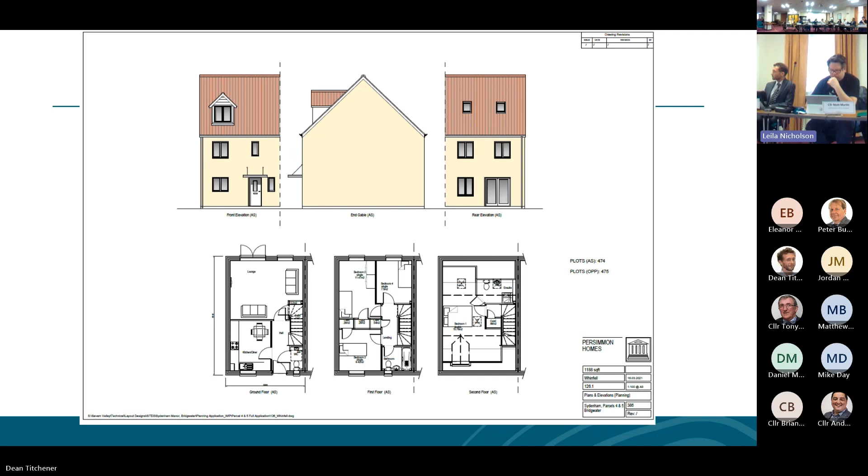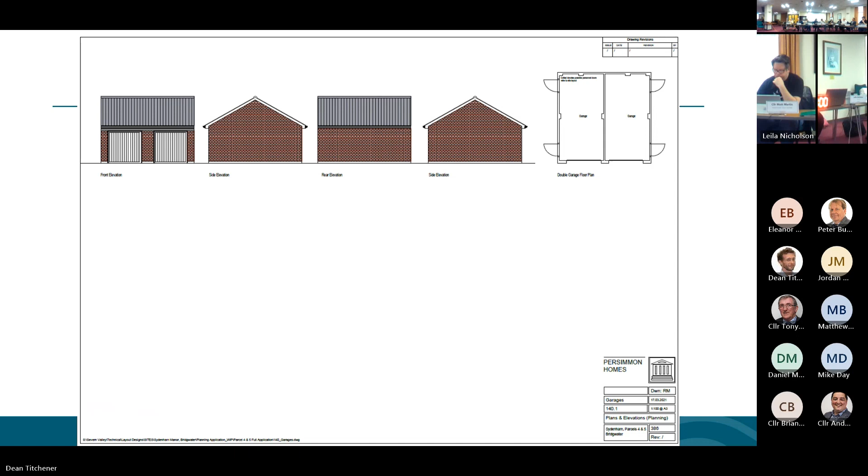Then sort of the final couple of house types. Again, very similar design themes. And then there's very few garages, but that's an example. The 2 detached houses facing north would have a garage of this type between them, which would help with acoustic methods.

And then we have the little play area, very much for the smallest children - the intent of these local areas of play is so that the smallest children can play within sight and sound of home. The rest of us would have good access. Detail of that equipment.

I think that's suggested that could be done by condition.

So starting at the top of the site, looking - the Willow Man's just behind me as I take this. There's the existing play area. There's that block of flats we saw in the previous drawing.

And then we're looking straight down the site, motorway on the left. So development would come up to follow the line of this and the block here. There is that rhyne, as you see, it's a deep one. And the bund would probably be on the line of that road there that's left over from previous activities on the site. It can be maintained from the left-hand side, and that's the IDB and National Highways England are very anxious that is maintained.

Just stood over on the left-hand side of the site, looking south again. So there's the existing houses. We get down to the bottom of the site. There's quite a lot going on because they're using the southern end of the site as a construction compound. The houses they're building just to the west - you can see it's dug over in this area. These are the house types that they're going to bring forward onto this site. So those are existing houses done by another developer, but very similar materials, general theme.

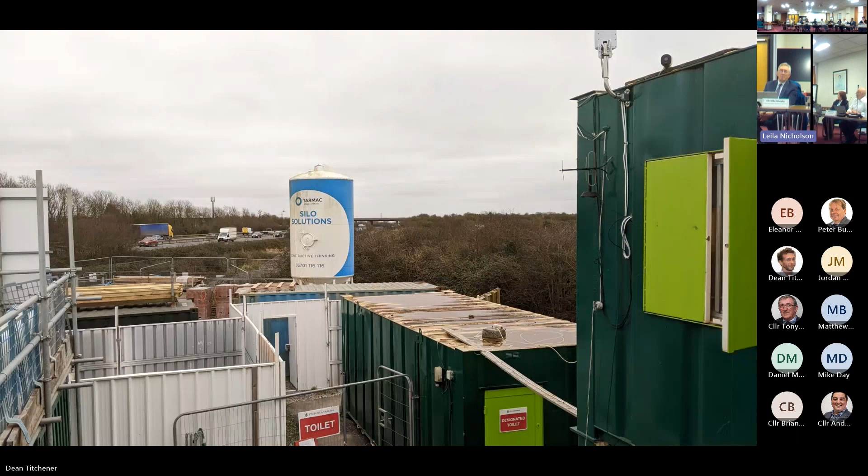This is just at that site office at the bottom of the site, just looking south - the site ends just at the end of this compound area, fence there. And that's all open area, the plans we're looking at.

And then looking north from that site office, you can see just here there is the original farmhouse with its buildings behind. Next photo just zooms in on that - so you have a sort of traditional stone farmhouse with a range of outbuildings. I think they were stables.

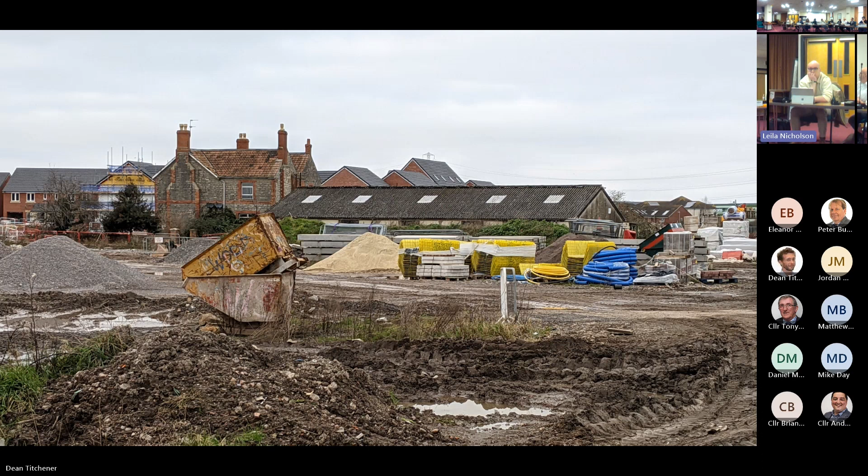Looking along the motorway, that road disappears as part of this application. The bund is potentially lined up. And then just looking at the existing buildings again, there's the outbuildings at the back — those are the ones that are part of this application. The house at the front has already been agreed for removal by a previous grant of permission.

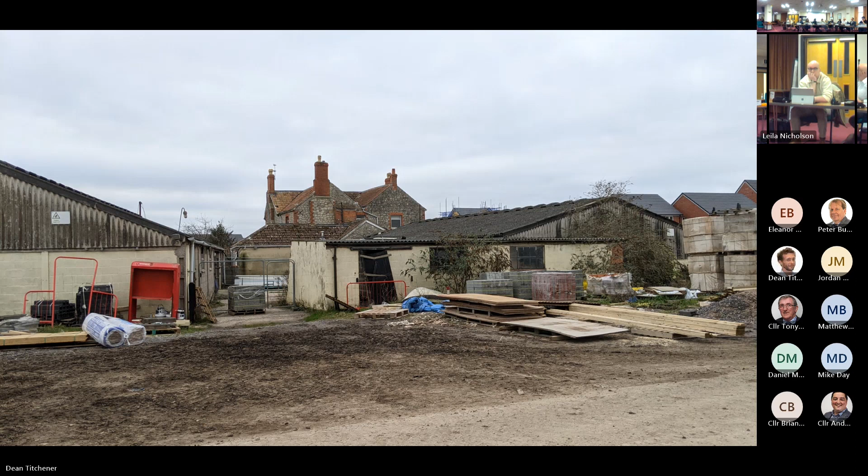Just to give you an idea of what it is, this site sits on a site that's already got planning permission, the blue edge line on the location plan. As you can see, the work is well underway on that part of the site. There you go, you can see that various slabs are already in.

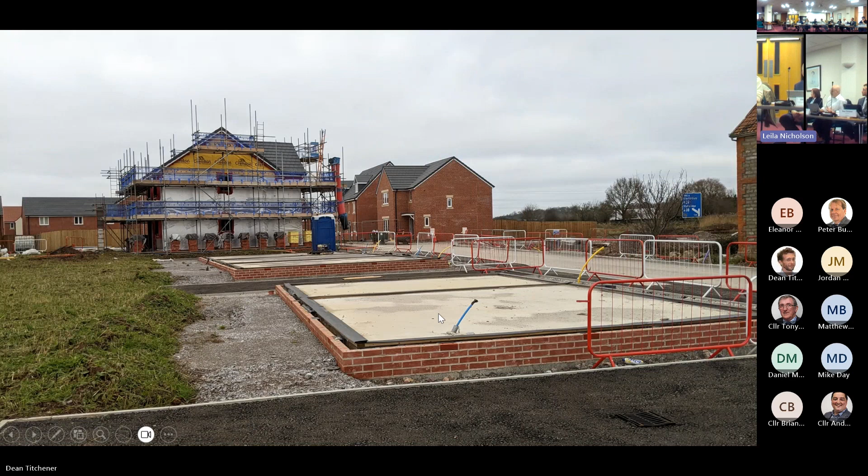And just looking across the site, back down to the construction areas, the bottom end of the site, down the far end there. So in terms of the key issues for this application: the principle — the site has already been approved for development, albeit with predominantly employment land. As set out in the report, I think there has been a reasonable justification put in for the loss of that employment land. It reflects arguments made on adjoining sites.

If we go back and picture the original layout of the North East Bridgwater development, a couple of those employment sites have already gone over to residential development. We've accepted the argument that demands on employment space have changed. It's accepted that there is a good supply of alternatives in the town, and this site, given where it is — only ever accessed through residential development — was probably an aspiration at the time. It's not needed by the market anymore, and is probably not ideally sited next to a residential area. So from that point of view, we have accepted the argument about the loss of the employment land.

In terms of highways, the access would be through the existing residential development. That's albeit not adopted yet, it's in the process of being adopted, and still being built out. There are no highways concerns in terms of how that would work, or the wider impacts of increased traffic this site might generate, given that it was originally envisaged to generate a certain amount from employment use and a certain amount from that element of residential. So any increase in traffic is probably marginal, not objectionable.

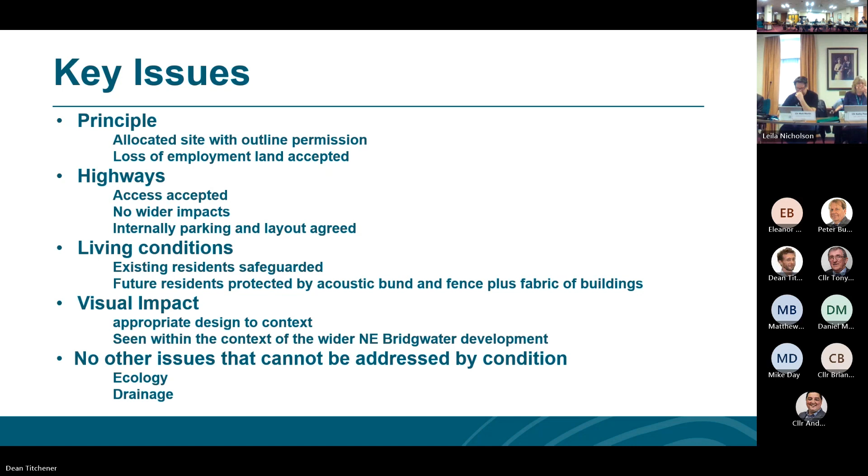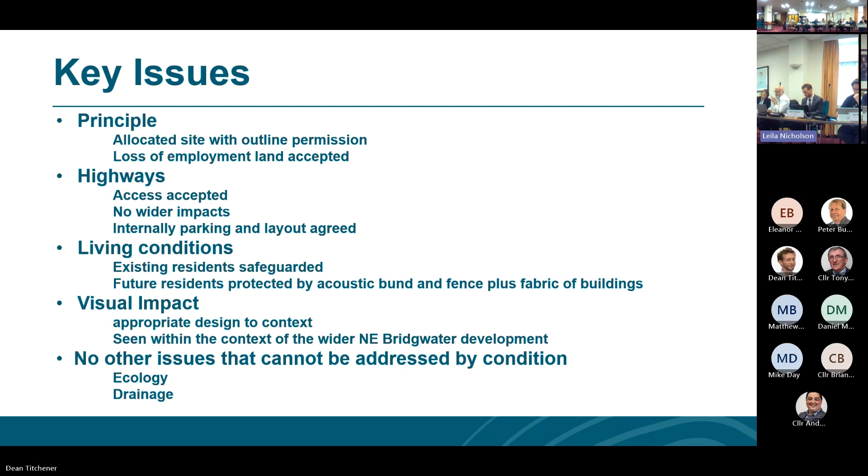Okay, hopefully you can hear me well. So I've lived in the area now for about 8 years, and even in that time I've seen that area expand quite rapidly. Even a search on Google Earth will show you the rapid expansion since 2012, and it is mainly housing. Granted, it may be needed, but my main concern is that they continue to build on what is left of the available green space. Even just taking a drive around the area, you'll already see preparations for all the other areas, which has already been alluded to on the diagrams. I think that makes it more difficult for people to get out for mental well-being, exercise and activities - it means they've got to travel further.

I have to disagree regarding traffic within the area - I have seen that increase markedly as well. The parking is poor at best, even for the already available housing. Just to get cars on the driveway is quite difficult, and because of that there's cars and vans parked on the roadsides frequently, up to and opposite junctions as well. This makes it difficult to get in and out on the main roads. I've even had to reverse out onto the main roads before. So the main concern is if anything bigger needs to get down, especially in an emergency, that's going to be quite difficult.

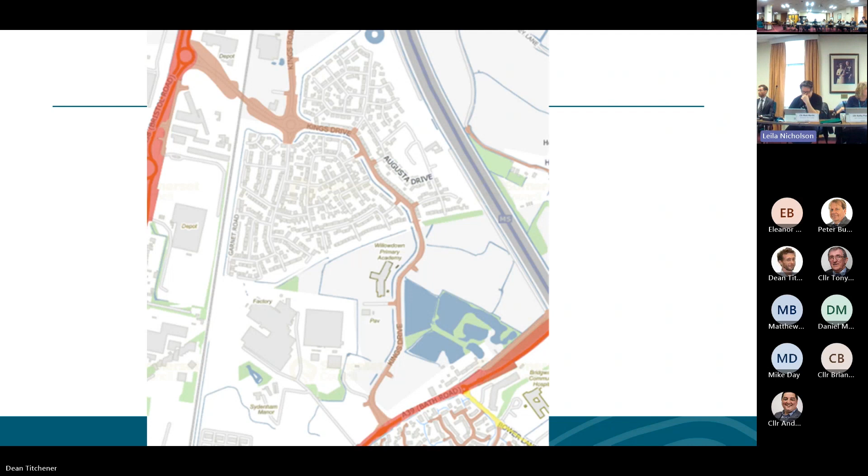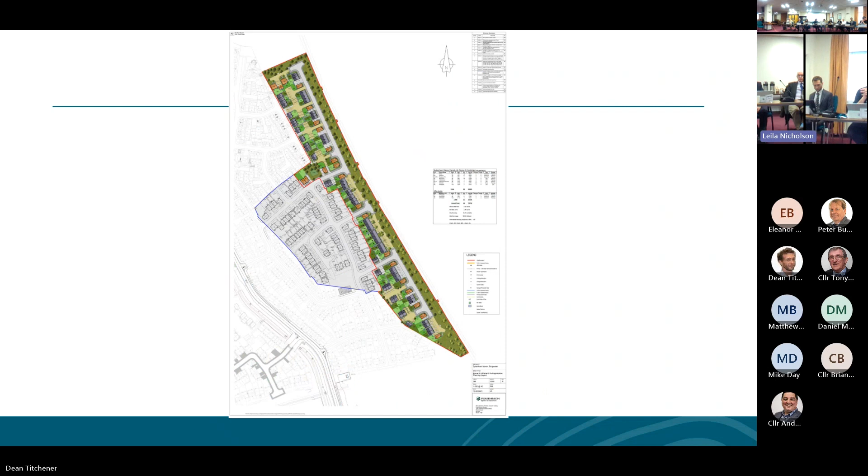Councillor Slocum: Yes, thank you, Madam Chair. Just a clarification, I didn't quite understand, my apologies. On condition 13, can you just elaborate what exactly that means? Do these house sizes meet the minimum space standards? And could you just clarify for me what size the gardens are, the actual garden to the house? Because I noticed it says 7 to 23 at the top, then 23 back to 7. I'm so sorry, I didn't understand that.

Right. So condition 13 - my environmental health officer suggested noise limits, they're not size limits. So what we're saying here is in those rooms between the hours of 7 AM and 11 at night, those noise levels are reached. Now those are LAEQ 16 hours, that's averaged over 16 hours. So we're not specifying noise limits for living rooms and dining rooms at night, simply because people tend to move into bedrooms. That's why we have a lower 30 decibel limit over an 8-hour average at night times in bedrooms.

But they also need to manage noise events of more than 45 decibels - for example, if you had a particularly noisy vehicle go by, so they need to be able to contain the noisier ones of those. So those are the internal noise limits. And then in the garden areas, again daytime hours only - nighttime it will be quieter anyway, the motorway's quieter, but during the daytime hours of 7 till 11, 55 decibels, again over that 16-hour average. So that's fairly well-trodden noise metrics that my environmental health officer is very familiar with. She recommends these on all these developments up and down the motorway.

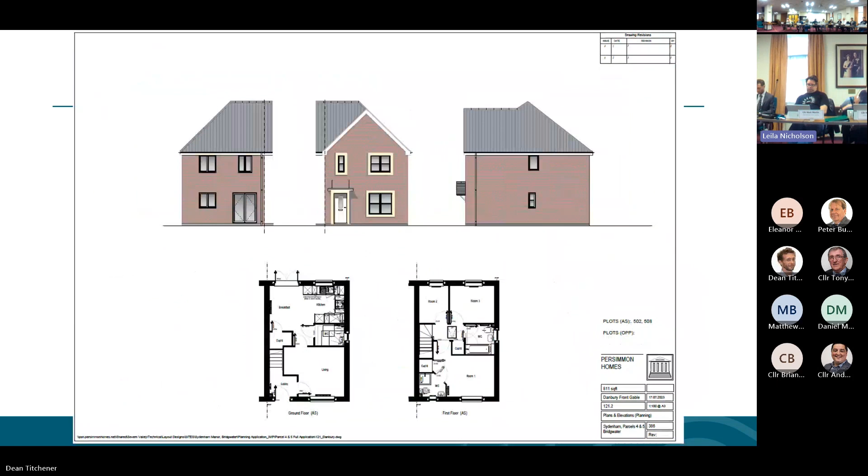Mr. New, just so everybody's clear, and not everybody will be familiar with LAP and LEAP, would you like to just explain what's involved?

A LAP is a local area of play. Quite often they have no formal play equipment, although it's been suggested here that it could have earth moulding, a few flat tree stumps or logs to climb on, basically to facilitate play. A LEAP is a local equipped area of play, larger than this, with more formalised play equipment, so that's a medium-sized one. And then at the high end there's a NEAP, a neighbourhood equipped area of play, and we're not in that sort of territory, those tend to kick in at very large developments.

This on its own, 90 dwellings, would normally trigger the need for LEAP provision on site, unless it is agreed that there is alternative local provision available, which is what we would read in this instance.

Thank you. Councillor Martin. Thank you, Chair. Excuse me, my question was about the LAP as well, actually. To follow on from that, it's not a very big area, but it is in a good location, centrally overviewed by some houses, so there's supervision and whatnot.

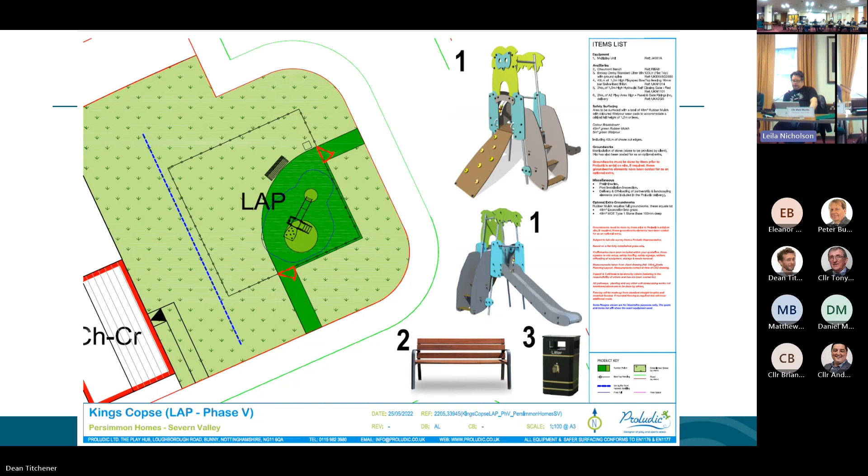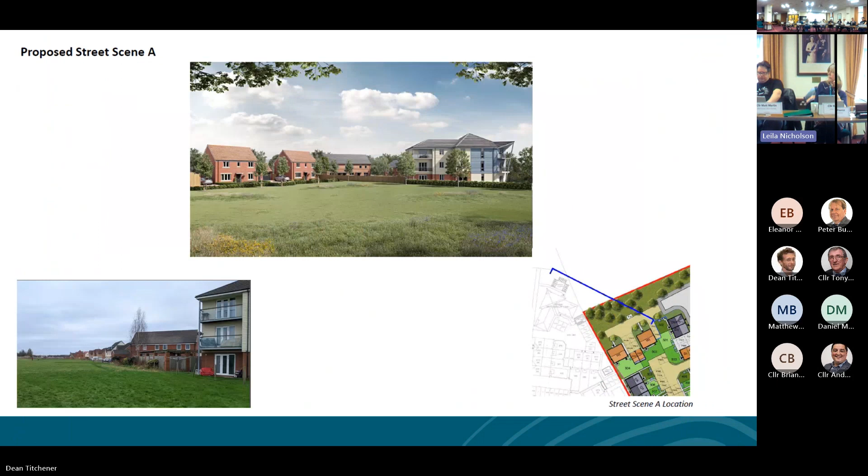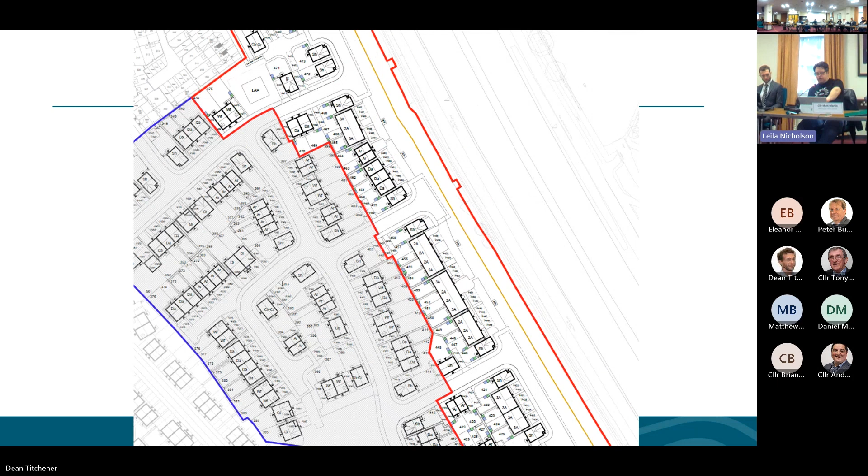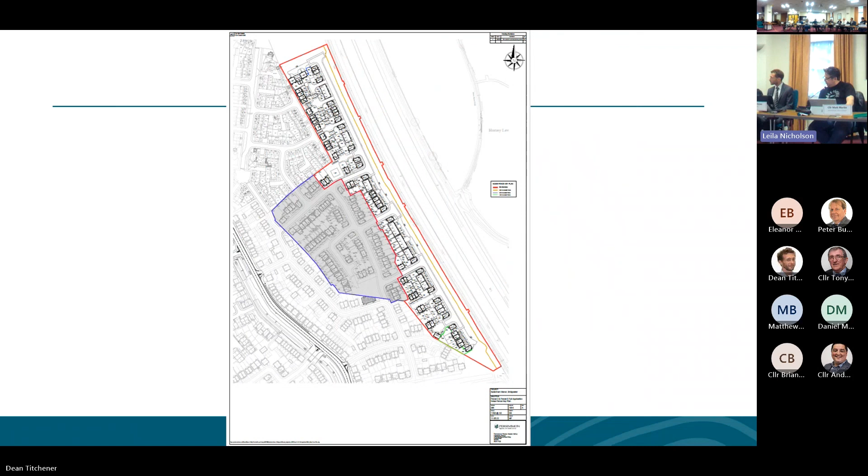But I was looking at the bund plan and the overall site plan. Now, we have the LAP in the centre, but that's going to cater for very small children. How many dwellings are there going to be here? There's quite a number, 90, a good number of which will be occupied by young parents who have young children who grow up into teenagers. And try as I might, in all my years as a teacher, I could never get them to stop playing football. I noticed the only other open space here, apart from the area up at the Willowman, down at the south of the site, is a moderately sized green space, maybe 8 or 10 houses in size.

I can bet £1 that people are going to play football down there. What worries me is that the motorway is right next to it. I'm no athlete, but I bet I could get a ball over that hedge, right onto the motorway. Has it been considered to install something like a rugby-style net there to stop balls going over?

Children will do what they do. Sorry, wrong drawing there. So the bund does extend around that area, that's 5 metres.

Kickable over, I accept that. It's 2 metres tall, so from that point of view, it's not formally an area of play. It's an area sort of landscaped. It was difficult to fit anything in down there. This is left over, unfortunately.

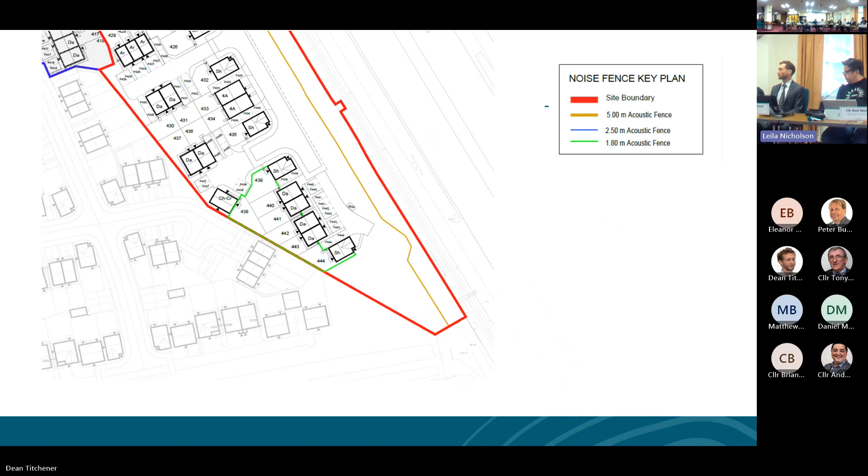In the same way, I suppose, if children chose to play football in the street running alongside that Bund, there would be the risk of that. It's a reasonable distance the other side of the motorway.

Where's that typical section there? So you've got a considerable distance from the other side of the level area, the Bund, the maintenance strip, the Reen, the motorway, verge. It's not something that my play officer has identified as a risk.

I think possibly we're in danger of straying into worst case scenario. If someone was determined to do something silly here, they might find a way of doing that, but I don't think it is realistic to expect that. I don't think that bottom area will be attractive as a play area. It might, in terms of kicking ball games.

Well, you were a teenager, I'm assuming, if you remember that far back. But I think, in the same way, that green space to the north of the development is flat level grass, just as likely to go over from there. There's no evidence that's been occurring from the current use of this existing area. We would know about it if it did - I think it would have been flagged up.

Okay, thank you. And as Dawn points out, there is no bund along this area of open space currently. So I appreciate the concern, but there's no evidence that it's a real one.

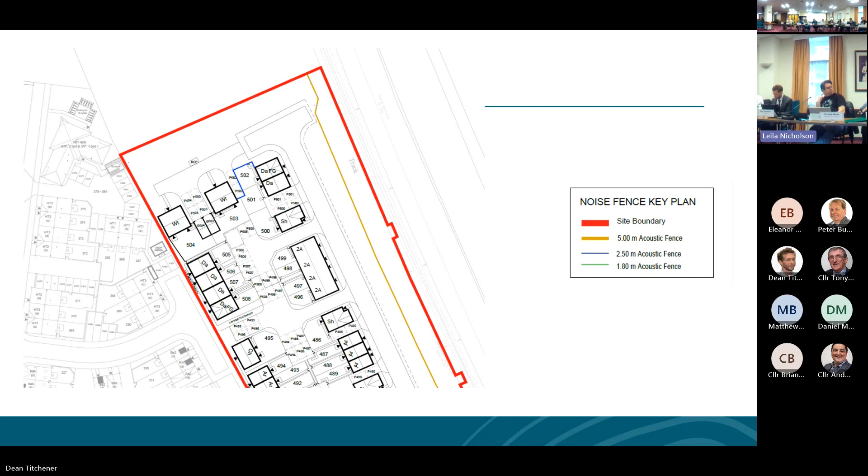Query about all this - I mean, it's starting with the bund. When you showed us the cross-section earlier, the motorway was showing quite considerably higher, and we're saying the ground level is going to be raised. So when we talk about the height of the bund, are we talking about the height above the raised level? We've also had issues with bunds on previous sites because when they get built, they have a habit of sinking, so they don't remain at the height you put them in to start with. The ground drops, and if we're dropping it on ground that's already been made up, that's likely to drop even more. But the motorway isn't going to drop.

So how convinced are we that that bund and fence is actually big enough? Because we're only talking about 5 metres in total, which is not great when you compare it with the size of the properties going behind it. And if that then subsequently sinks as well, I'd like to know how we make sure it remains at the height it's supposed to be and doesn't drop.

I'm alive to that issue because I've got a feeling the bund might prove to be quite steep, and that creates issues for stability and also for the landscaping, because a very steep, narrow bund has got potential to be very free draining, meaning the landscaping must take that in mind. I did insert the word technical into condition 12, so the details shall demonstrate the technical and acoustic feasibility. The intent of the word technical is to show that it's the construction of the bund works, and that's where we would capture that concern.

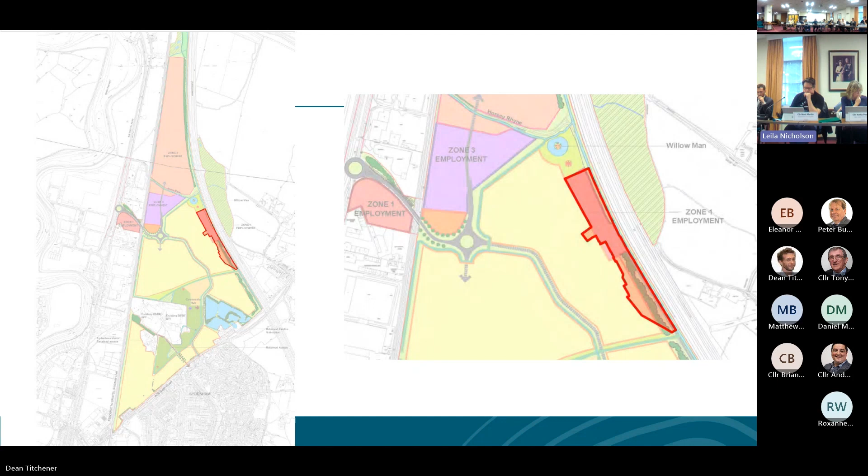Going to the ecology, the badger bit first - I think the reason that approach has been taken is there is a survey, they've done the badger surveys, it's just that survey was done roughly at the time of submission. It's been a while, so that's a belt and braces approach, just to check the badgers haven't got back on site. Given what the majority of the site is being used for, a big chunk of it being used as a builder's compound, I very much doubt that's the case, but it's belt and braces.

There is a tail piece to condition 20 - it does say once installed, such features shall be retained at all times thereafter. Whether we're going to go out there and check there's still piles of logs, I think we have to be pragmatic on that, but certainly where bird and bat boxes have been installed, and the hedgehog friendly fencing, which is my hobby horse, yes, certainly we should be on top of that. What I'd say, the flip side is this will be homes for 90 people. We encourage this sort of best practice to go in at construction, but we would need to review pragmatically if someone decided they were allergic to something and these things need to be removed. We do our best.

Thank you. Councillor Sterling, then Councillor Martin and Councillor Hendry.

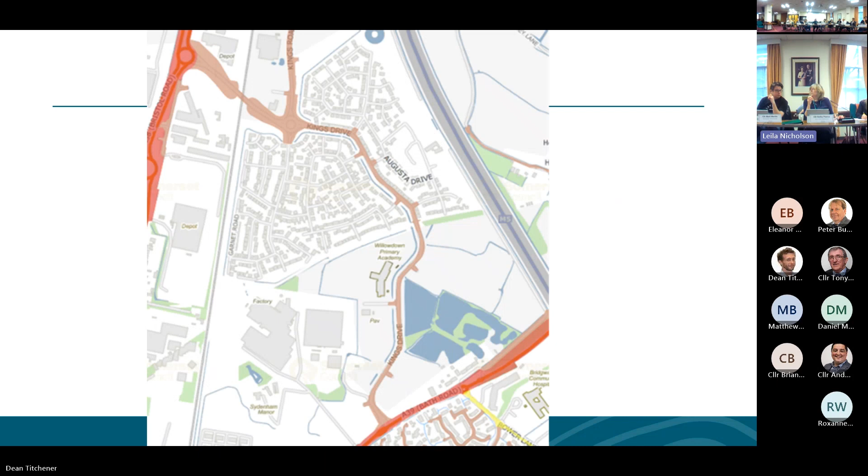Thank you very much. I always hope that we've learnt from the past, and I always hope this, but you know what? Shared drives, small gardens cause neighbour disputes right from the word go, and the need for housing is so great, but I don't think we should be packing people in to where people's health and well-being is so vitally important.

And I think to have a garden for most people is an essential. There should be a minimum space that we can give people, rather than try to force so many housing in, because people are so desperate for housing, they end up being in there, and most of the disputes happen. The shared drives, I can't tell you how many times I've had to go and sort out shared drives. Parking on the front of people's housing. It's a reality. It isn't something that's not happening.

It's happening every day. Most of the arguments that happen are about parking. And I just fear in the recommendations, I don't see anything about design. I don't see the design, the recommendations about design. I don't see anything that gives me a bit of confidence. And I'm just a little bit worried, Mr. Noon. If you can make me happy, I'd appreciate it.

Hopefully there will be some reassurance gained from pages 36 and 37. I do consider the sort of design and visual impact. There is a design code, a wider design code for the whole North East Bridgwater development. That is quite elderly now, that design code. It's of its time, I would guess.

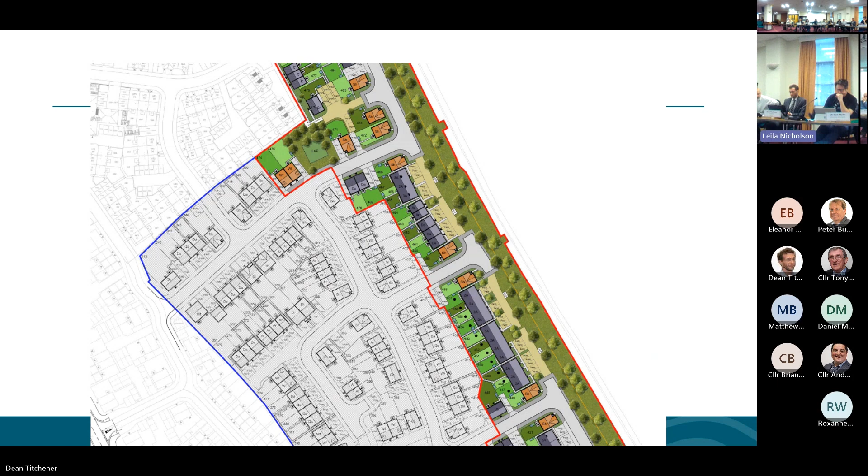It might not be the design code we would go with on a similar development if considered under current policies. But it does very much follow the principles of the design code that was set out for this North East Bridgwater development. In terms of the individual house types, they are using the same material, the same general proportions as the other houses on the adjoining parts of the site.

As you would expect, that is a logical continuation of that design, materials, and general theme approach. I think you'd be struggling to say that we should actually, on this particular parcel, do something completely different in terms of the design.

In terms of the parking arrangements first, I think these parking arrangements, I would hope, don't create conflict in that there's no shared areas between two properties. You can see that there are tandem parking spaces for individual properties. There may be some conflict within that household about who gets the innermost parking space. I don't think we can say that is a fundamental problem.

A lot of the other properties have houses parking perpendicular outside their frontages. There's no other way they can use those. So hopefully those will be retained in perpetuity and available. They wouldn't be subject to misuse.

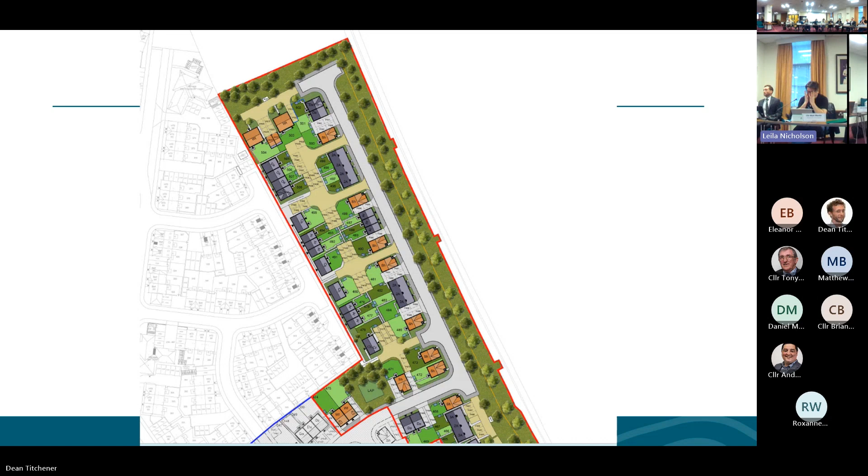In terms of design, it does say design parking to be unobtrusive, allow for future phasing out of parking to reduce carbon emissions. So in terms of the location of the parking, we are showing it to be a secondary element to the main road, which would also encourage natural traffic calming because of the right angles to go into, which again is compliant with the guidance.

And it does say reduce vehicle speeds and give priority to pedestrians and cyclists. So the road arrangement does reduce the speed of vehicles, and the open courtyard area - having occupied one of the properties elsewhere in Kings Down, the rear courtyard areas are often used by kids for cycling and things like that - so it does encourage pedestrians and cyclists.

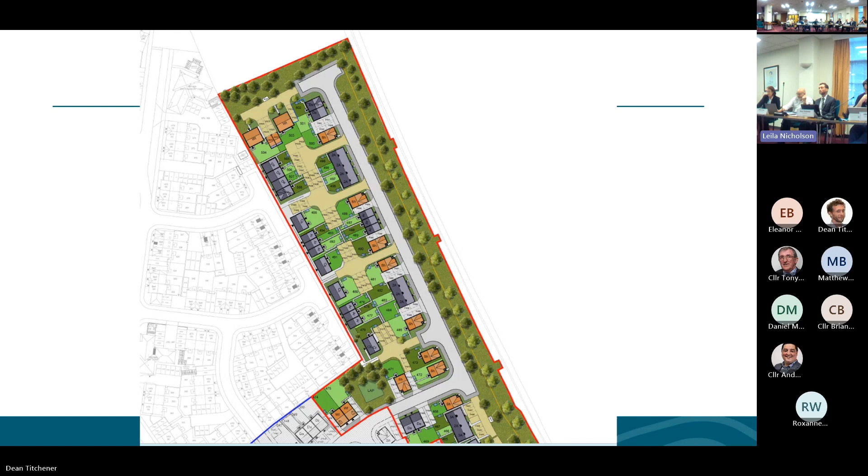And the material palettes, it said, should be simple, taking into account local context, and avoiding big areas of tarmac. So the areas shown for parking are a differing material to the main road, so it appears as a secondary element, more complementary to the built development. That's the emerging placemaking and movement design principles adopted by full council. It's not planning policy as yet, but it's had quite a good response in consultation and will be coming through as guidance for officers. In terms of how this proposal complies with emerging design movement, I think we would say we're quite happy it's in line with the direction of travel for the council.

Oh, thank you very much. Thank you for that. Councillor Martin.

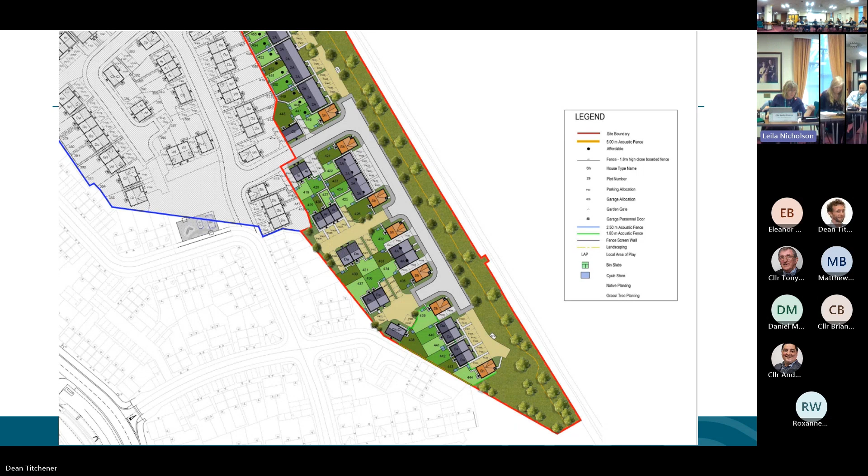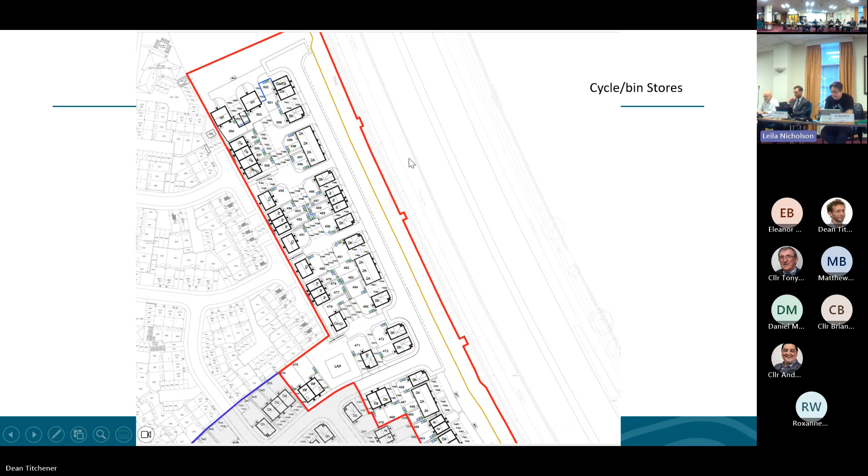But is there a way for us to revisit the bund in a certain amount of time, or to ensure that it's done properly and won't slump in the first instance? You're going to show me a condition where that's shown, aren't you? Yeah, I think hopefully condition 12, with the requirement for them to agree technical feasibility. We get the full construction methodology of the bund, and it shall be maintained, and then the tail piece of that condition: shall be maintained in accordance with the approved details.

That, you know, if the bund was to slump to a point where it no longer complied with those agreed details, there would be a remedy there. We're also looking through the Section 106 agreement to agree the maintenance of the bund, and hearing what you're saying, we could certainly include within that the management and maintenance of the acoustic fence bund. We could include a requirement that if it blows over in the wind they will have to replace it, and that any slumping could also be put right through that mechanism.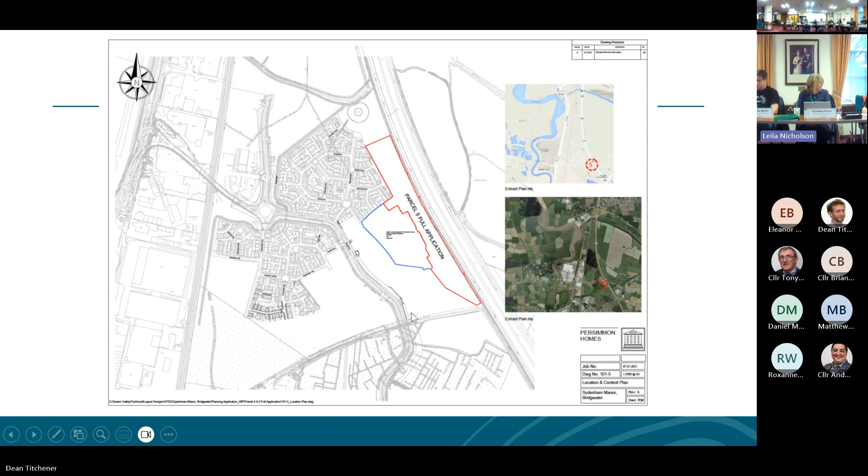Bottom southwest corner, I think, of the new development, the proposed one, shows a vacant piece of land, but the houses are all built on there now, so that slide must be out of date. Is that correct? Yeah, I think possibly the aerial shows that. Right, so this area is under construction - Google flew over here a year or two ago. So there are houses built up there now, these images are out of date, okay.

A couple of points - that in its own right could be classed as an infill, we've had this before, because of the houses northwest and the ones at the southwest, you could just class that as an infill. Given the planning history already for this plot of land, it would be very, very difficult to put up an argument to refuse this, very difficult.

Okay, it'd be very difficult to actually refuse this, given the planning history already. I've watched the presentation, it's gone on for some time now, listened to what everybody has said, which is fair comment. Conditions will have to be applied here, but that is yet to be determined and put in place. Given all of that, everything put in place, I propose we grant permission. Thank you, Chair.

Thank you, Councillor Hendry. We do have a couple more speakers, but can I just clarify, is that proposal to grant the officer's recommendation to approve with all the amendments, which I and the officers will go through before we take any votes? Is that to include all the amendments? Absolutely, that's why I said about the conditions. There are too many for me to start going through the list, but yes, you're absolutely correct.

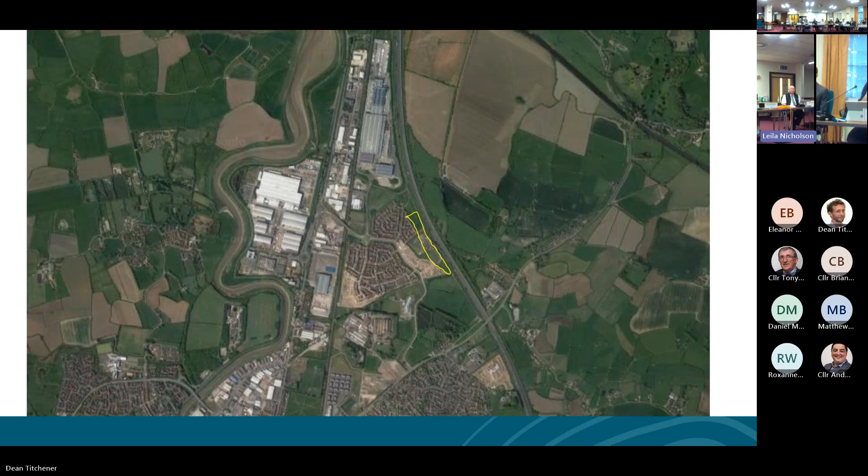And the rhyne you sorted out from the point of view of drainage, if people can get in behind with their machines and clean that out. I just wonder, 15 years for trees to grow up and obscure something. I just wonder if some of the trees could be put, say you've got the length of the bund like that, that's 15, 20 yards, you could incorporate some mature trees right in the actual bund now, to break the bund up, so it wouldn't look so bad.

Break the bund, there you are, break the bund, with mature trees. Certainly, we can take that forward as a comment when we are looking at discharging the landscape condition, I think it's condition 24, with the specimen tree planting. From my experience of looking at similar bunds in similar locations, I don't doubt that with a good landscaping scheme, that will be achieved.

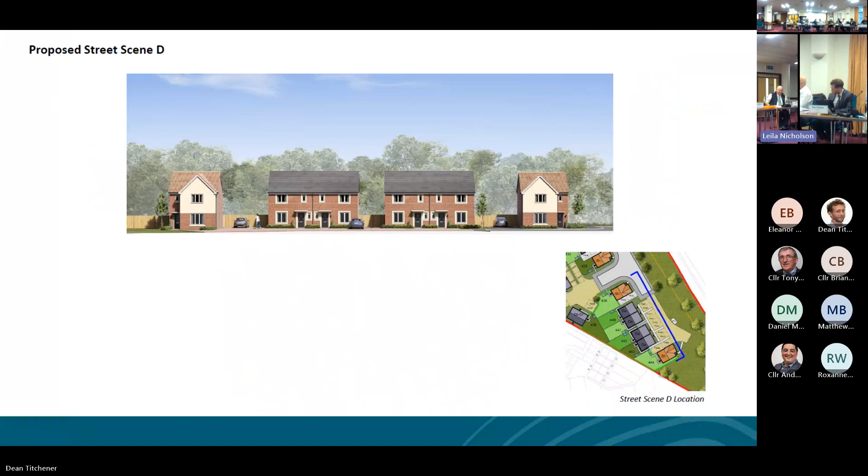Is the planting in consultation with the landscape officer? I think we need to be careful about how far we go down the route of making our own suggestions on that score. We'll be looking at the technical build with a lot of internal consultees. The management of it, and the landscaping of it, will also involve a lot of internal consultees who have all expressed interest at this stage in seeing the detail, as well as external consultees.

Thank you, I don't see any more speakers at this moment. Is now a good time to clarify potential wording for the changes of conditions and suggestions made regarding section 106 additions? So if I may clarify from my note, I've got to grant permission subject to the amendments to conditions 4, 7, 16, 19, 23 and 11.

The wording of such amendment conditions to be delegated to the officer and the chair and vice chairman - sorry, let me just read this again. The wording of such conditions to be agreed with the officer in conjunction with the chair and vice chair, and subject to any consultation response from the NHS concerning the securing of any financial contribution, if I've got that right, Adrian. And then the third point I've question-marked is the travel plan - at the moment it's a condition, are we looking to put that into section 106?

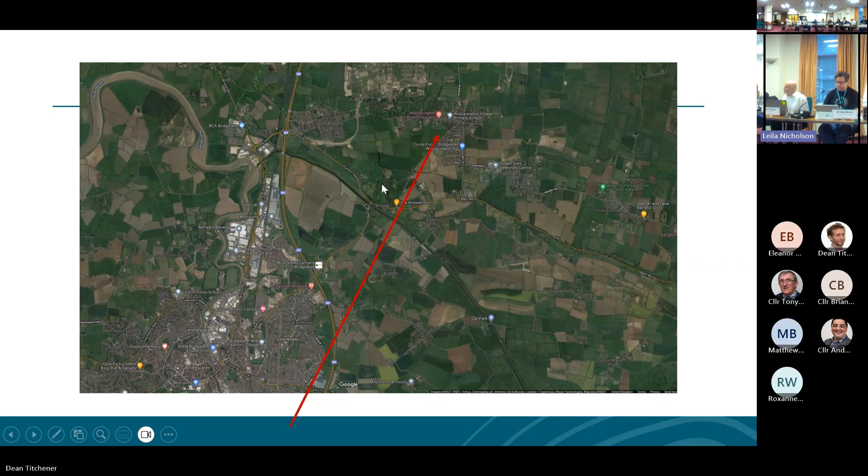So yeah, this is an application, the address or location is land south of Lavers Close, in Woollavington. It's a scheme for the erection of 14 affordable dwellings. So just to widen out to an aerial plan. Woollavington is just to the northeast of Bridgwater, one of our larger villages. And the site is on the western side of the village.

So this is the plot, these two rectangular shaped fields here. Lavers Close is actually this development immediately on its north side, which will be accessed through. So with the location plan I've shown here, the access comes through the first scheme, providing access to the two adjoining fields.

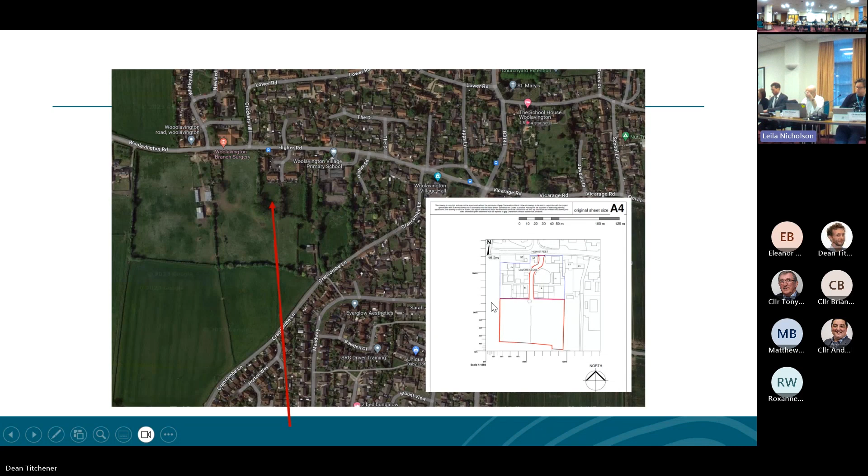So just doing a couple of photos to get some context. It is currently an overgrown meadow, bounded by a mature hedgerow and tree planting. As shown by this image, there is a central mature hedgerow which would need to be lost, along with some foliage tree planting, to facilitate the development. So that would need to come out. That's showing some photos.

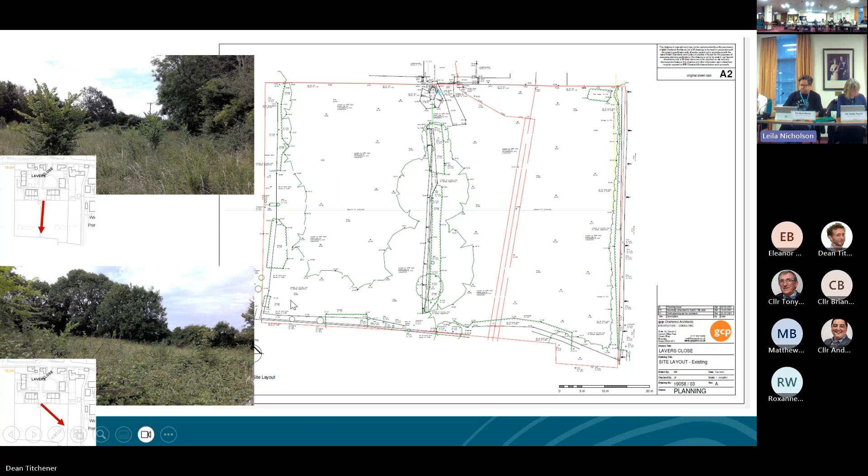And then this is effectively the layout as it would come in from the existing site to the north. There is an existing turning head from where it will come in, and then it continues. So it's 14 units of access, offering a very simple T-shaped road layout. There is space for a LAP, a local area of play, at the far eastern side, and there is an ecological buffer zone on the western side because of some ecological constraints.

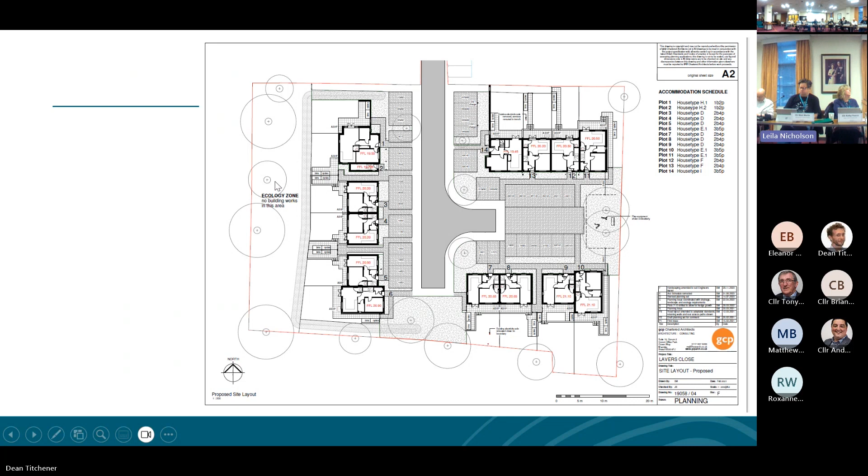And then in terms of the principal development, this is an affordable housing led scheme. Woollavington is defined in the local plan as a tier 2 settlement, so those are some of our large villages like Wedmore and Cannington.

They have their own housing target under policy T2A, a certain number of houses supposed to come forward in those villages to meet district need. In the case of Woollavington, there's already a scheme which has consent for the target, known as Woollavington Hill, brought forward by Wain Homes, for 225 dwellings. That's a part full, part outline scheme that got consent, I think a decision was issued in 2022.

So policy T2A sets an overarching target for these larger villages, but meeting district-wide housing needs rather than local housing needs specifically. Under that there was a sub-policy, T2B, which sets a basis that if you have unmet housing needs in these locations still, there's a mechanism for bringing forward additional other sites. That's effectively the basis for bringing this scheme forward.

So in terms of the principal development, I've got an excerpt here from the housing needs assessment. Policy T2B talks about proposals having to fill an identified need for affordable housing as evident in an up-to-date housing needs assessment. There was a new parish council sponsored housing needs assessment produced by our council's housing needs team, Duncan Harvey's team, in March 2023. The table shown here is an extract from the conclusions, as it identified an outstanding need for 46 affordable rented units in the parish.

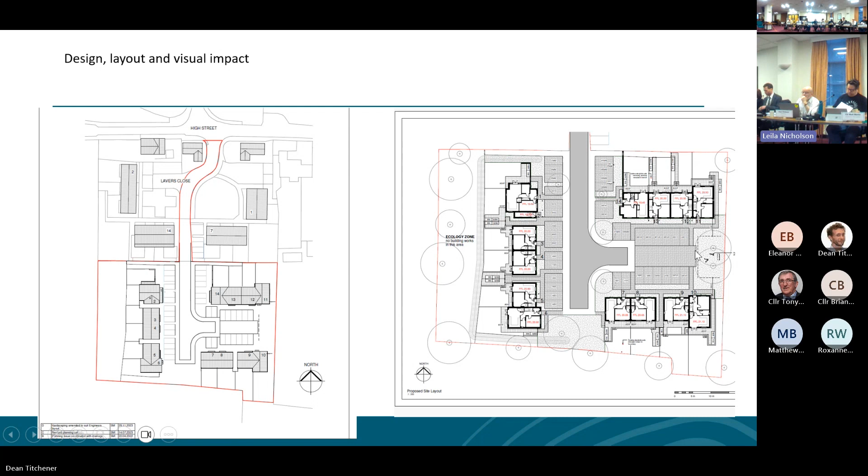In terms of the dwelling design, they primarily take their cues from the adjoining Lavers Close scheme. In terms of their height, form, design, and appearance, they're not dissimilar to the adjoining properties. The materials of buff brick and primarily off-white render with concrete tiles will aid assimilation with the existing development.

The rear of the properties is bounded by close board fencing. That was put in, particularly on the western side, at the request of the Crime Prevention Officer. Originally it was a more open fencing, but they had concerns, so that's been amended and changed. Overall, it's quite a small, simple layout, but we would consider it acceptable.

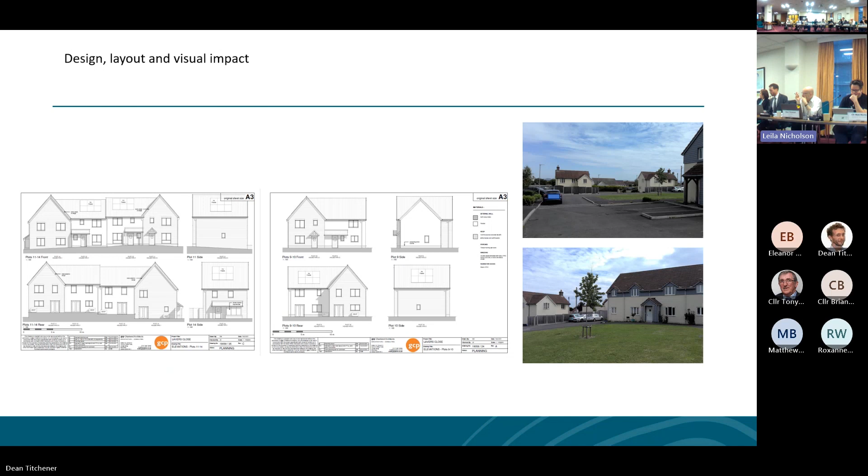In terms of the amenity impacts, trying to achieve an acceptable relationship with existing properties to the north is obviously the main factor. Care has been taken to ensure an acceptable relationship, particularly regarding plots 11 to 14, which have a separation distance of 19.5 metres to the rear elevations of those nearby existing properties.

Originally plot 14 was closer, with the ones near the end of the arrow having a projection not dissimilar to that, so we asked for that to be pulled back to get some extra separation space. 19.5 metres is a rule of thumb, but our general rule is about 20 metres separation, so we are thereabouts.

Plots 1 and 2 here have a slightly shorter separation of about 17 metres, but they don't have any north-facing windows on their first floor, so there isn't any opportunity for overlooking from that elevation. It's been designed so their windows face the other direction, so there's no overlooking or loss of privacy arising from that part of the proposal.

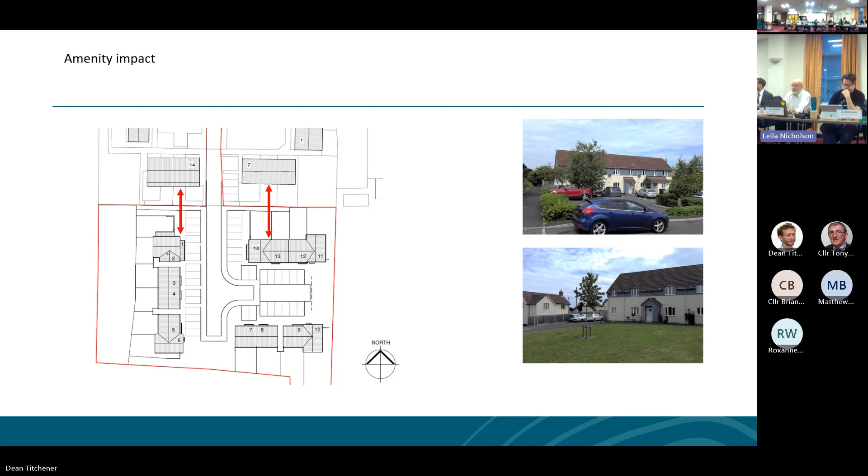Internally, all the units are well proportioned, each benefiting from sizeable rear gardens. There are conditions proposed to minimise impacts of construction, covering matters such as contaminated land, hours of operation, and submission of a construction management plan. The advice from Environmental Health and our own assessment is that, with those measures, the scheme would be acceptable in terms of its amenity impact.

In terms of highways and parking, the existing Lavers Close has its own access onto High Street to the north, so it would make use of that. These photos show someone standing opposite, looking at it, and looking back towards that part of the village, as well as standing in the access looking back out west towards the roads heading towards Puriton. You can see from those photos that the existing access offers good visibility in all directions.

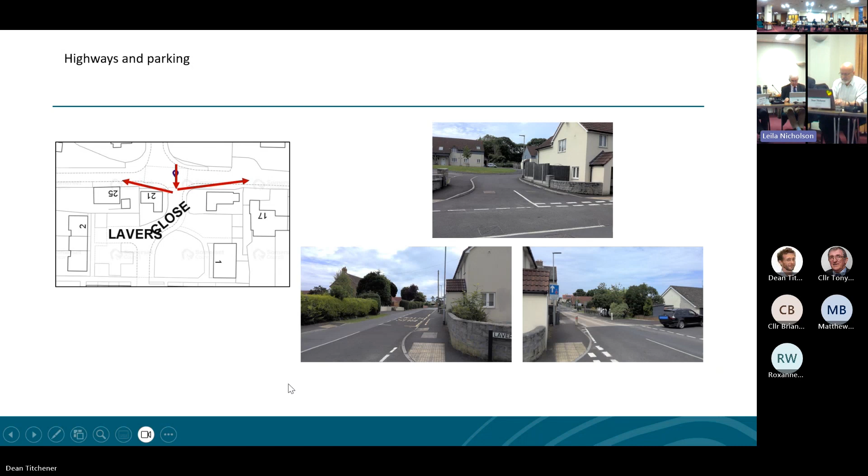The proposal includes 37 parking spaces. There's a slight inconsistency in the report because it mentioned 35 in one place and 37 elsewhere—the correct number should say 37 parking spaces provided. We consider that to be compliant with county parking standards, and accordingly the authority has commented on the application and raised no objection to the transport impacts or parking provision. So overall, in terms of highways and parking, we would consider it to be acceptable.

In terms of ecology and trees, there are various ecological recommendations regarding replacement of the hedgerow planting—that's the hedgerow I mentioned that had to be lost. There's also control of works and control of lighting that need to be imposed, proposed in the report as mitigation conditions. There is a badger sett, a replacement badger sett proposed.

I mentioned there's an ecological buffering zone—there's an existing badger sett that they need to close part of. Badger setts are usually in a bit of a network, sometimes with multiple entrances, so they need to close part of it to facilitate development. That needs a license from Natural England, and there's a condition requiring that they secure that license. They have to go in and do the replacement badger sett before they can then get the license for the closure of the existing one. So there's a kind of sequencing to it, but it's all to the satisfaction of the county ecologist as long as it's controlled by the conditions set out in the report.

There are some trees, as I mentioned, that have to be lost as part of the proposal, shown within that central hedgerow—they include 5 elm trees, 7 ash trees, and a small elm group and elm hedgerow. They are needed to facilitate the proposal. The advice we've had is those particular species are subject to ash dieback and Dutch elm disease, so it's quite possible they will be lost in due course anyway, and therefore the proposal is that we would not really object to their loss regardless—they would be quite poor species with short lifespan.

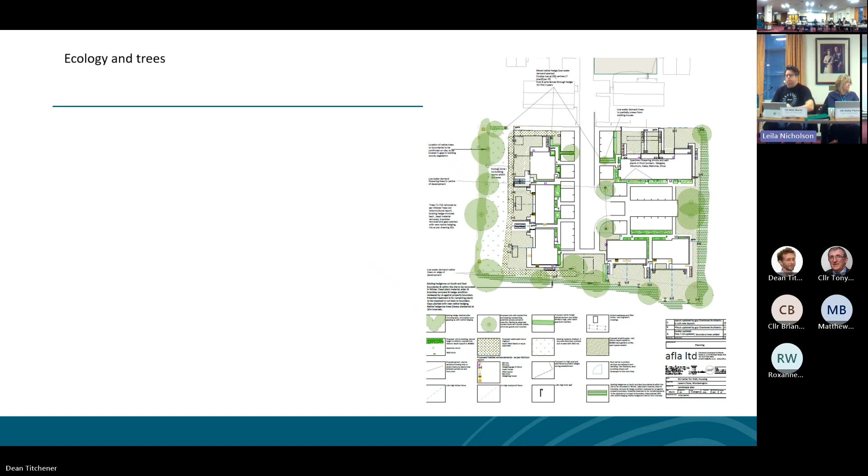Just on drainage matters, we've got a detailed technical plan showing the drainage proposals. One point of clarification: the report says site drainage is via a relocated existing drainage channel. There was a very shallow existing ditch running along part of the site, which is being relocated at the request of the lead local flood authority to run around the outside of the site. That's not the only point of drainage—the site isn't solely being drained by that. The swale is being moved, but the new development is being drained by a combination of things, including soakaways, permeable paving, and a restricted discharge into the existing network by on-site attenuation. I just wanted to make sure that was absolutely clear.

The lead local flood authority have been very involved in drainage discussions and are satisfied with the proposals.

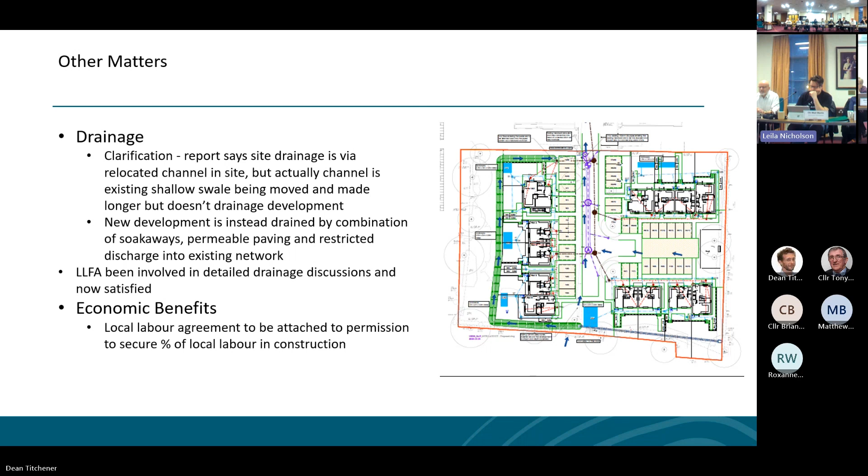In terms of economic benefits, we would attach a condition to secure a local labour agreement in effect, so that a proportion of people working on site are drawn from the local labour pool.

So just to summarise: the scheme provides affordable housing to meet local unmet need. We don't consider there are any matters which can't be addressed by condition. So the recommendation is to grant, subject to preparation of a Section 106 agreement, to secure the affordable dwellings with a local lettings policy as would be appropriate in this case, and the local area of play. Thank you.

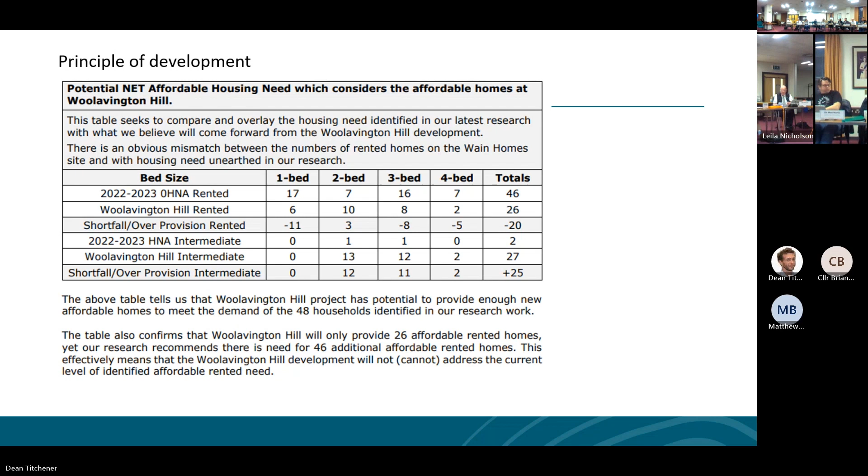So now we move on to the final application of the afternoon, agenda item 7 on page 83, regarding an application in Church Lane, Brent Knoll. And Councillor Filmer has already left the table, thank you.

Okay, so Mr. Noon, are you taking us through this one? Just give a moment to set up the presentation. Okay, yep, thank you very much.

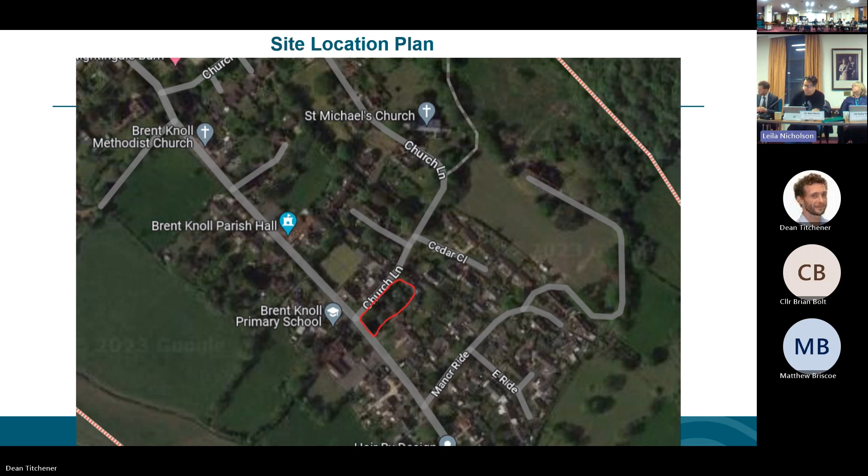This is an application for erection of a side and rear extension to this property. There is also a detached garage to be erected, and a conversion of the existing double garage to provide a home office, along with some associated alterations to the access reflecting this new garage. This is the site at the junction of Church Lane opposite the school. The property sits on the corner, it is semi-detached. The other half is just to the southeast in this photograph, with the road to the northwest, where the access is, and there are some trees around the perimeter of the site.

So for the purposes of the red line, this shows the property, attached garden, and rear garden. The access is just to the side off of Church Lane on the corner there. So there is the existing layout with the property and the existing garage, which would be converted, in the rear. The access is just to the front.

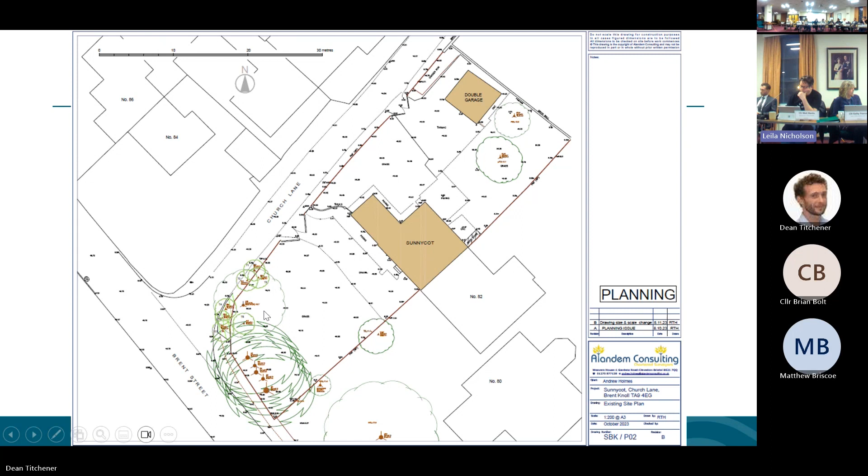Then we have this array of extensions - essentially a little bit along the front, you can just about see the outline of the original property. Then we have a side extension and a rear extension as well. To help you visualize the extent of extension, there's in pink the extra bits added to the house and the garage to the front. Then the alterations to the access - there will be a couple of parking spaces provided as well outside an area of hardstanding.

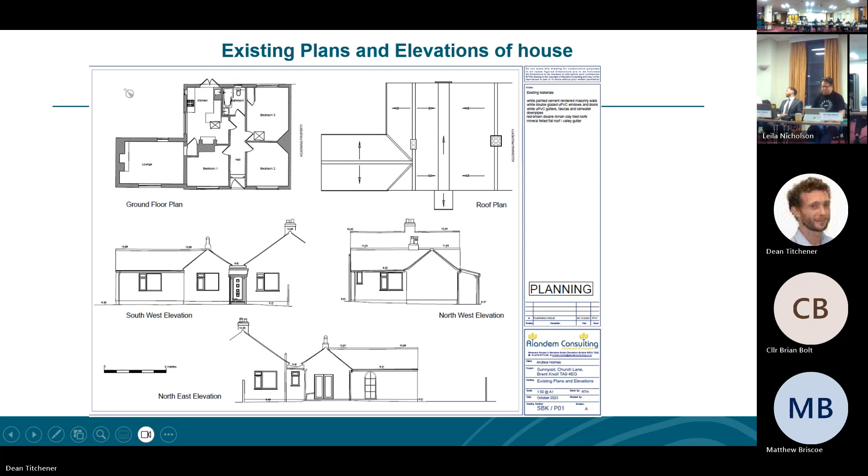So just quickly to show you, there's the existing property - a bit of an oddity, a very unique property, never seen one quite like this. The dividing line is through the ridge of the main part here, and then you've got half of this, the original property, with some additions over to the side. So it's fairly unique, one of a pair, one-offs, if that's right. And then there's that existing rear garage.

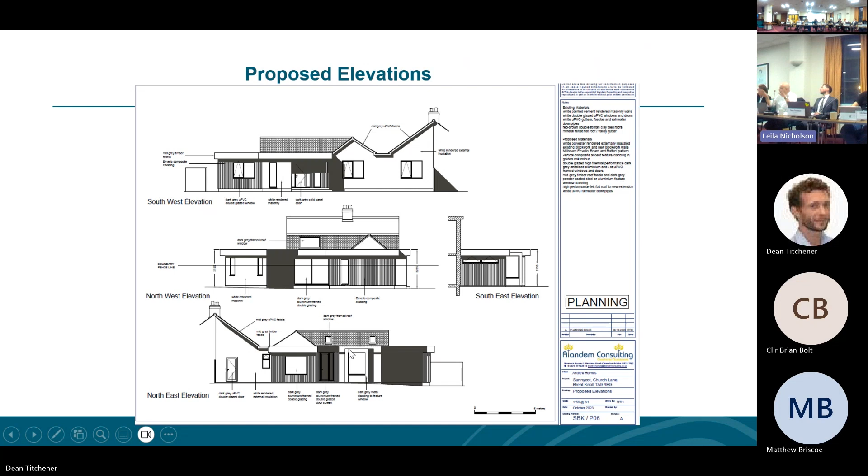The extensions are sort of wraparound. The top one is the front elevation, so a wraparound flat roof extension going out to the side. There's the side, so it extends out, and then to the rear here, where you have those two wings coming off at the sort of angles.

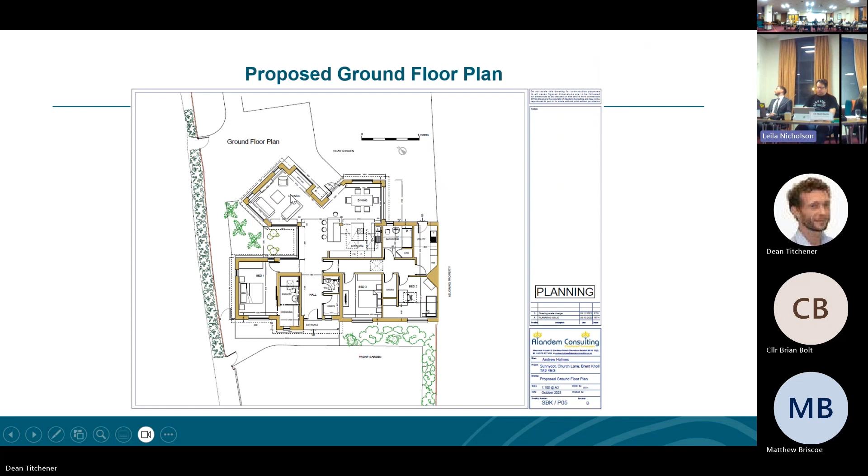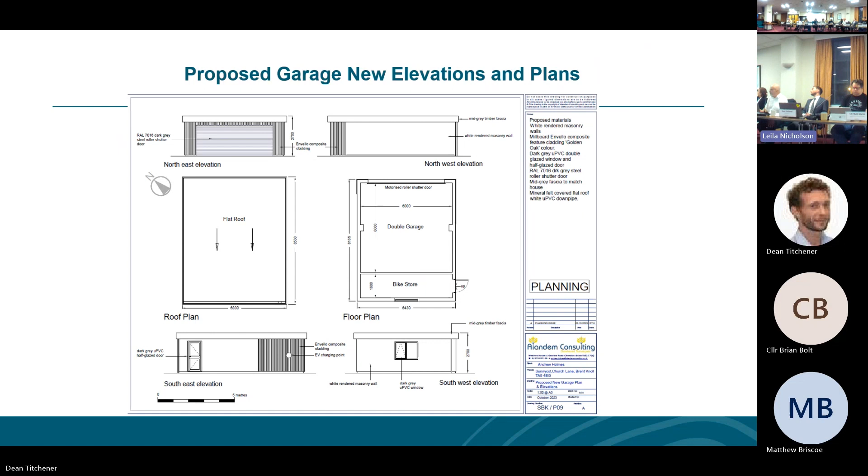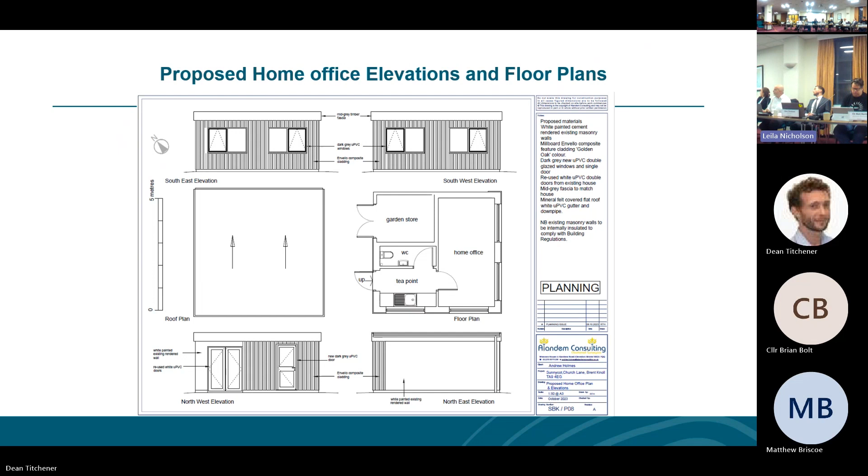That's the new front garden garage - a large double door, roller shutter type door, and a sloping roof, very gently just to get a fall on it, but essentially flat roof in terms of visual appearance. Continuing the same theme, it's composite cladding, not actual timber, with flat roof detailing.

In this instance, we consider the sole contentious issue here to be the visual impact. We are concerned as officers that the scale and design of these flat roof extensions doesn't really reflect the character of the building itself or the locality. In their own right, we don't have problems with this sort of extension - they're normally to the rear. We did make some suggestions about maybe omitting the front bit and reducing slightly the side extension, given that the side extension would be so widely viewed.

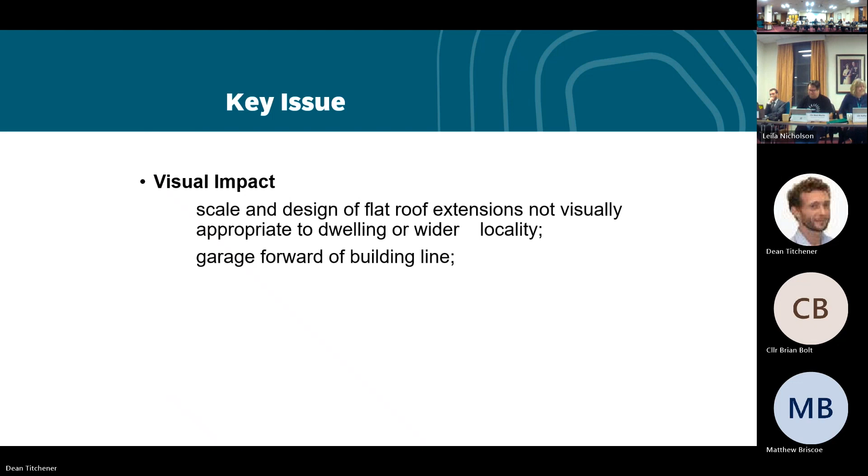Thank you very much. Yep, thank you, members. For those of you who've known me on the committee for a while, they know I'm not a great fan of modern contemporary design, but I think in this particular case, this actually meets a need. What we've got is, as you've seen, the original character of the building is quite unique - it's a pair of semis.

It's interesting to note that a little while ago, we had another planning application on this site, for a property to be built which was 2-storey. We had huge numbers of objections from the surrounding properties. The Parish Council objected to it as well, on the basis of the impact it was going to have across the road.

There are bungalows behind, predominantly bungalows. The applicant has actually designed this, I think, specifically to try and help the neighbours. By keeping it low and wrapping it around, it means the impact on the street scene and neighbours is minimal. From a character point of view, by keeping it down, you will still see the original character of the building, because the element that protrudes above will still be visible.

In terms of the street scene, I know the officer recommended potentially an extension along the ridge line currently shown towards the road. I think if the applicant had taken that, you would end up with a very large amount of roof looking up the street as you come down from Church Lane. So it would have a bigger impact on the street scene than what is proposed.

I do understand this is very much an 'eye of the beholder' application, but I think the applicant has done absolutely everything they can to minimise their impact on their neighbours and the rest of the village. From my own point of view, I would hope you would be able to support this application. Thank you very much.

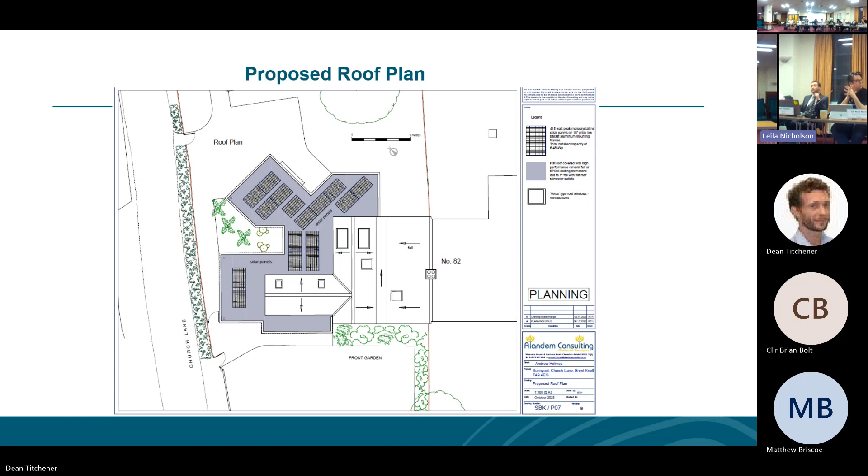Good afternoon everybody, I'm Andrew Holmes. I am the applicant, and for clarity, I am also the owner of Alandem Consulting. My in-house architect has largely dealt with the drawings, the application, and consultation with planners. But just so you're aware, it is going to be the home for myself and my son, who's 12 years of age. It's a new start for us after 2 or 3 terrible years, resulting in the loss of his mother on Christmas Day 2022.

Moving forward, I hope you've had the opportunity to see the supporting document we submitted to the officers during the initial consultation period, dated the 5th of January 2024. It's very much a watered-down design and access statement, but it does, I feel, adequately set out the reasoning behind the design ethos and why I think it should be approved.

Summarising, I think there are two issues set by the officers: one is to do with the building line, and the other is to do with the flat roofs, particularly on the gable. Dealing with the first, and having heard the other applications today, communication is key. I've done a lot of that with the neighbours, who've had a lot of concerns with the site, so I've dealt with that as best I could.

Concerns of height, loss of natural light—because there used to be big trees down the boundary—and being overlooked. My scheme is entirely single storey to avoid any of that. Furthermore, it's already hidden well on Brent Street by 10-metre-high trees. Tomorrow I'm having 80 laurel bushes at 1.5 metres planted along that road boundary.

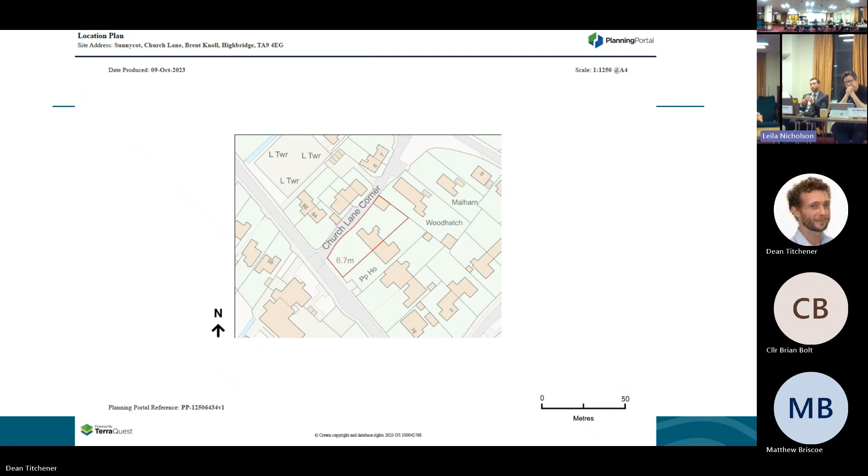That's not sustainable for me or for them, and that's why I need to put garages in the front. I'm hoping that what you've heard and what you've read shows that I'm trying to do a really good design.

Thank you, Mr. Holmes. Councillor Slocum, Councillor Grant, and Councillor Henry - but before that, can I just ask Mr. Newman, is there anything you wish to respond to before I take councillors' questions or comments? No, unless there's any questions from around the table.

Thank you, Chairman. I fully respect Mr. Newman's position - he's a professional, he knows what he's talking about. But I do think in this instance, when somebody can communicate with neighbours and actually find a better way around something, then he's done all he can, and that's key - when you can talk to neighbours and improve the design. So I do respect what Mr. Newman was saying, and I fully understand why he said it, but I would like to move the recommendation to grant permission.

Sorry, to move the recommendation to grant permission, not to refuse - to grant.

So we need a planning reason why you are making that recommendation. Okay, planning reason - very important, the planning reason.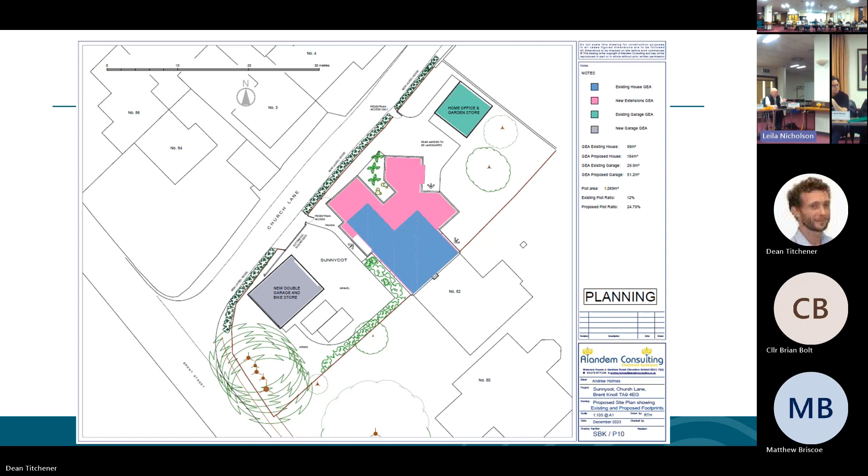Thank you, Chair. Councillor Bolt: one for Mr. Noon really, or whoever's pushing the buttons - can we go back to the photo taken opposite the church, whatever it is, there's a photo, that's it.

Thank you, so we have no other speakers. We've got a proposer and a seconder.

Sorry, Madam Chairman - because there's an overturn of an officer recommendation, the actual decision has to be delegated in terms of the appropriate conditions to be added onto this particular application. So if members are happy that the appropriate conditions can be agreed between the officer and the chair and vice chair, then we'll move on that basis. So we could just double check with those who've moved and seconded if you're happy for that to be done. Mr. Noon - pretty much exactly the same point, conditions I think are fairly straightforward.

The usual time limit, a condition to list the plans. The archaeologist has suggested a condition on page 85. You need to put that on. And I think a condition just to ensure that the landscaping as shown on the drawings we've seen is done.